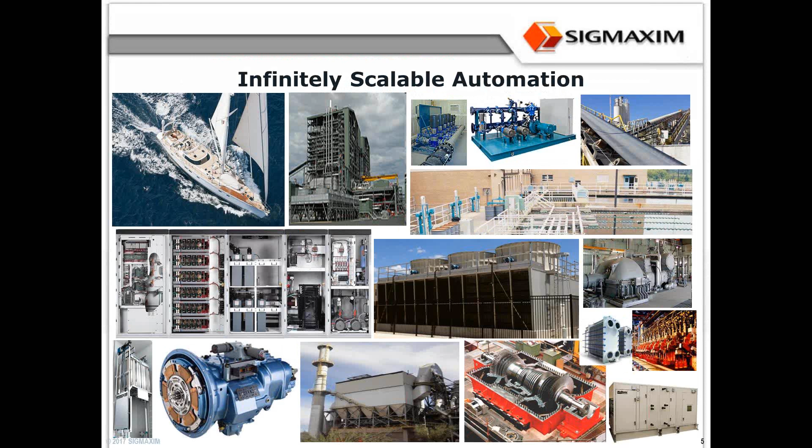So from products that are like a boat, which have multiple subsystems that exist inside, to things that are much more flexible, like making tooling for bottles and stuff like that. So beside the size of the product, there are also products that require you to have a lot of design flexibility while you build them.

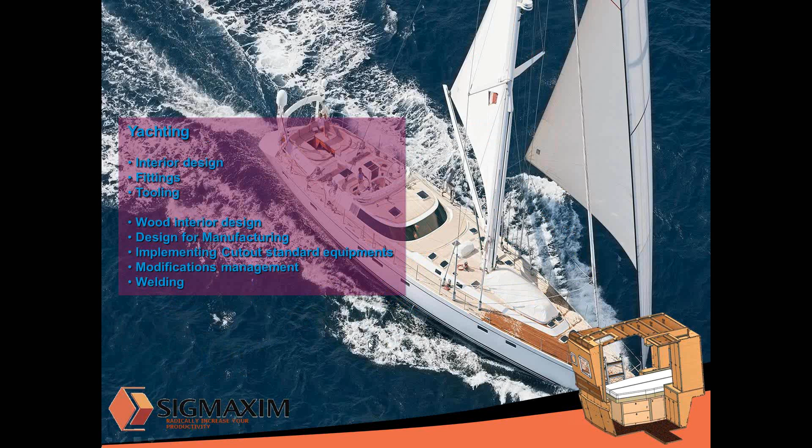So it's not a product that's totally like a pump, pre-engineered ahead of time with multiple variations of what you can change in it, but rather a product that kind of has to fit an environment that you're building. So things like a yacht here, each one of them is a unique product. An architect actually draws what it is that you're trying to build.

So how can you automate something that is going to be very different from one point to another? That's the type of thing. Another thing would be like watches. You're really literally designing watches to be unique from one to another. So what you're trying to do is basically automate the process, the steps that are going to be taken as you build these products.

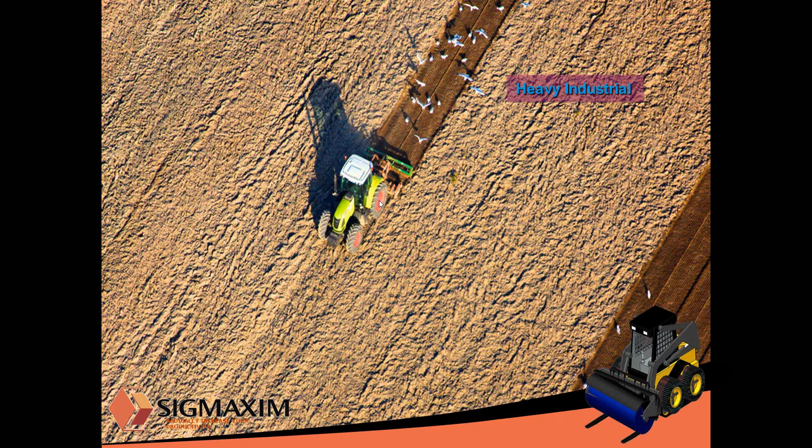So things in the medical field, industrial type products, they're very different from one to another. However, the process of building them is the same. So we want to automate those things. For us in the company, since we've been working in this automation for 17 years, internally we have over 20 different what we call implementation practices. They're all automation, but the needs of different companies about how you implement automation differ.

So internally we had to build tools that apply to a lot of different environments, but internally we also had to be able to talk to each other about what it is we're trying to do. So I'm not going to talk about 20 different things. There are a lot of nuances in there, but I'm going to take 4 different buckets and talk about them here and show you some demos.

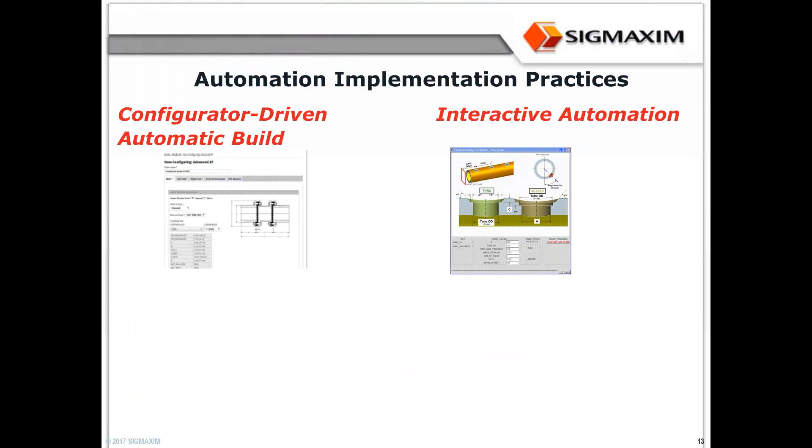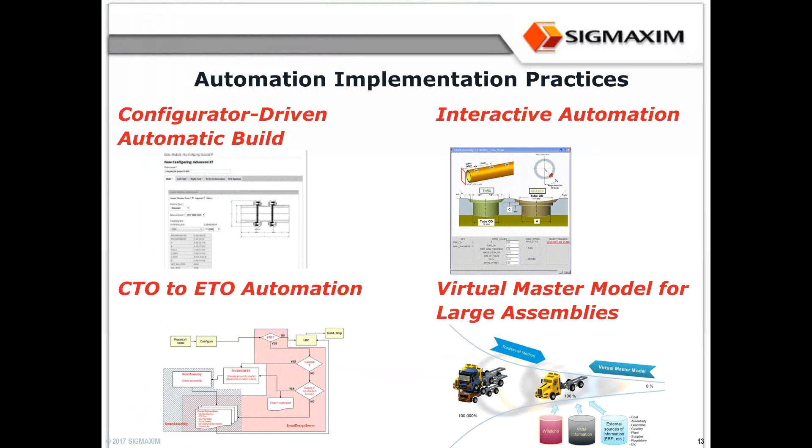So the very first thing is what we call configurator-driven automatic build. I'm going to talk about something we call interactive automation, which sounds like an oxymoron. I'm going to talk about engineer to order type products, configure to order to engineer to order product automation, which is kind of a mix of these two. And the next thing is something we call virtual master model, which is really dealing with very large assemblies and how we implement them.

So let's start with the first one, which is probably what most everybody thinks about when they think automation: what we call configurator-driven automation or automatically built products. Creo, for example, gives you tools like Pro Program, which allow you to have overloaded assemblies and turn on and off features and sets and parts and actually create a finalized assembly and part based on it.

So this whole concept is what almost everybody who thinks about automation of a product would think about. And we have different approaches, obviously, over 17 years working in this field. But for us, there is applicability. The applicability of automating the build of a product is that you have a product that can be fully defined right from the beginning.

The rules could produce an infinite set of results, and the input could be large, could be complex, but you can pretty much define everything up front. There is no intermediate user decision that has to take place. All the product exclusivity and dependencies are fully known, so there's no invention in here. And you need it to be totally autonomous, built without any user interaction, so all your engineering and non-engineering staff can enter a bunch of input data and automatically build a product.

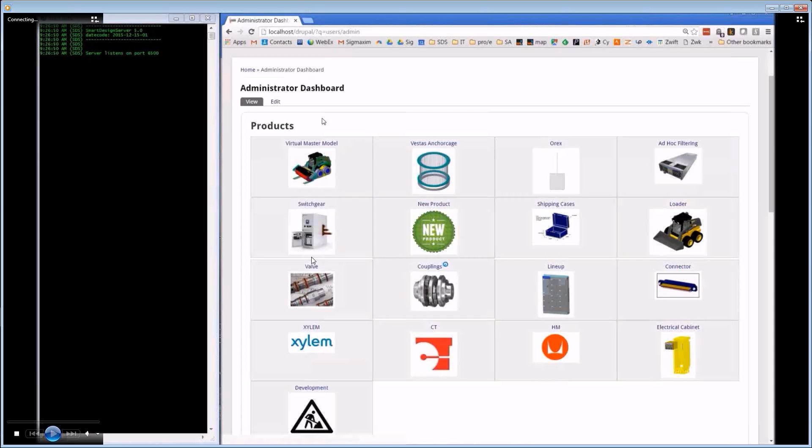So the very first thing is that with some customers, they need to be able to capture these rules and to build them. So the very first thing that I'm going to show you is what we call SDS Web, which is basically our configurator. It's a web configurator. You go and you sign on, you have an account, and out of this, an administrator would have built what the product rules are. So you have methodologies.

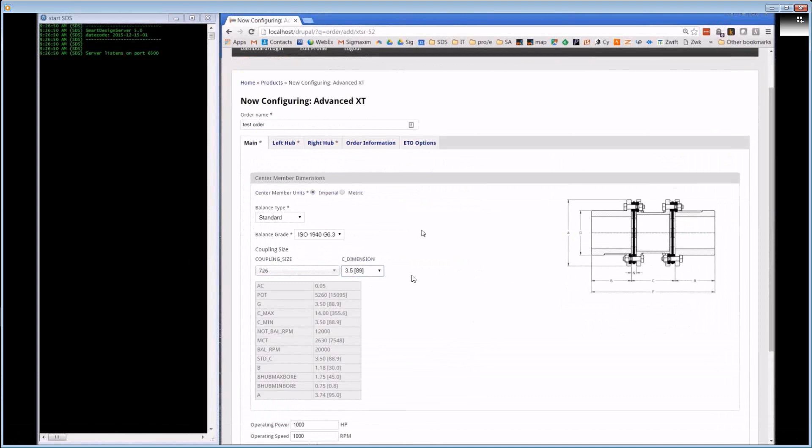In this case, we are picking a bunch of different options. Different options will go into the database, crunch data, give you some results back. It can do some math, which we will be doing later. So an administrator went and defined what your products are and what the exclusivity rules are, what the dependencies of different things to each other are, what is it that you're going to present to users in order to capture

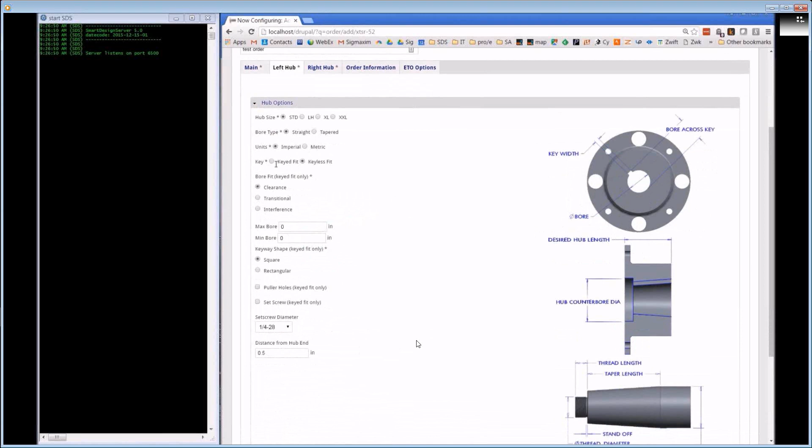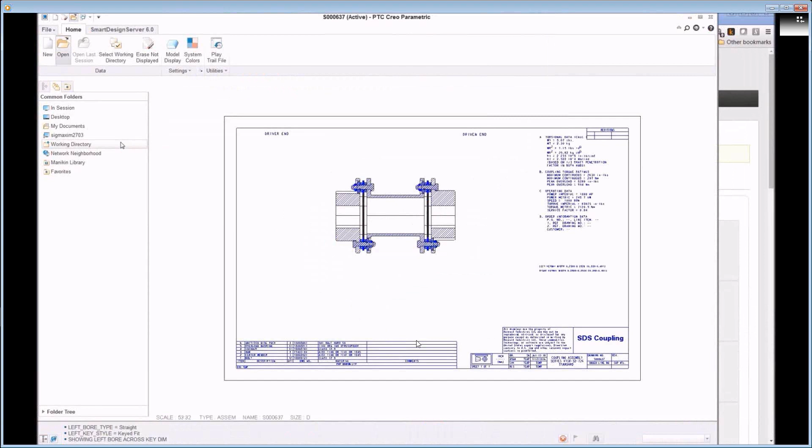these parameters. And if you hold on a little bit, you're going to see Creo. I know this presentation is for people who are interested in Creo. Once you define these methodologies, a server that's sitting in your server room is going to pick it up and start building the stuff in Creo. So Creo is going to take that data, which is all the rules of how to build that product, and you see it assembling what it needs to assemble, creating parts as it needs them, creating a drawing as it needs to. I'm going to stop this for a second.

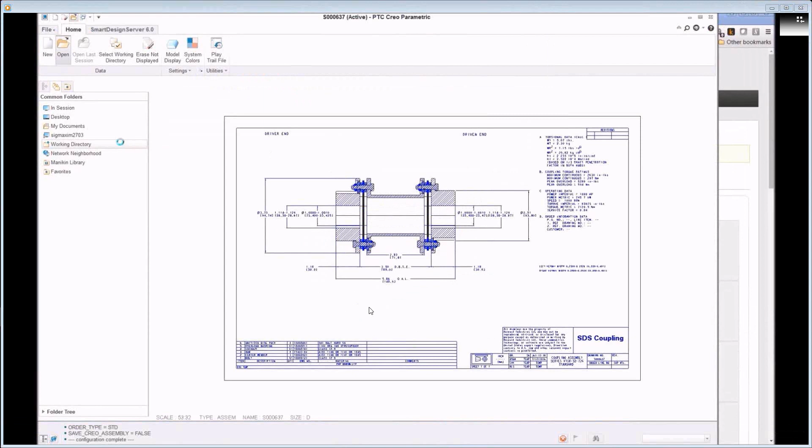All of this is happening on a server in the background. Nobody's seeing this, but that would make for a boring demo if I don't show you what's actually happening in the background on that server. It's happening in non-graphic mode because it's a lot faster to build it in non-graphic mode. So it builds whatever it needs to build.

And then whoever is on that portal, in this account, sees that there is that configuration, and that configuration has certain deliverables that came in from Creo. And in this case, we sent them that drawing with a bunch of other calculations, and we sent them basically a PDF of the drawing so they can decide whether that's indeed what they want to have.

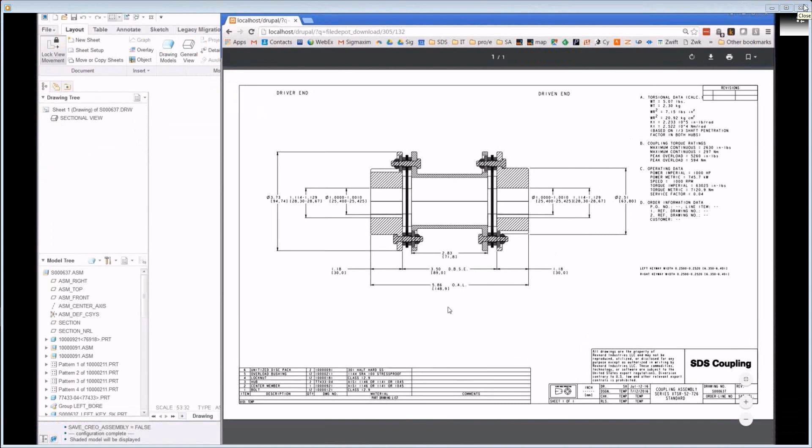So this is, to us, this whole area where we are crunching product automatically. The rules of how to build these products are known, and we put them together by reading these rules and going into Creo and building the stuff in Creo that we need. Now, so far it's pretty straightforward configuration of product that we've built. Even though here I showed you stuff that's building a new object, not just putting objects together. You can see that it's assembling things together, creating some features, making new parts, making some drawings.

Configuration of automatically building product can also happen in a much more complex environment. So I'm going to show something else here that is a little bit of a next step, basically. What we have is this packaging kind of environment where we're putting together some pump equipment and all the plumbing of how these things are going to go together. So again, we're going to go into this configurator. We're going to build it.

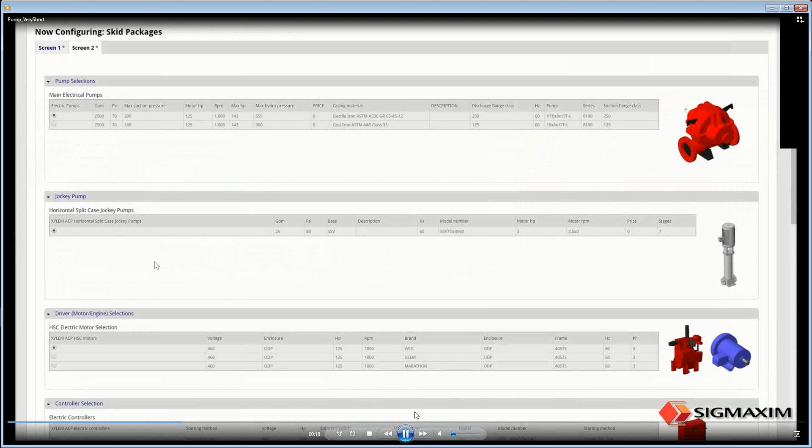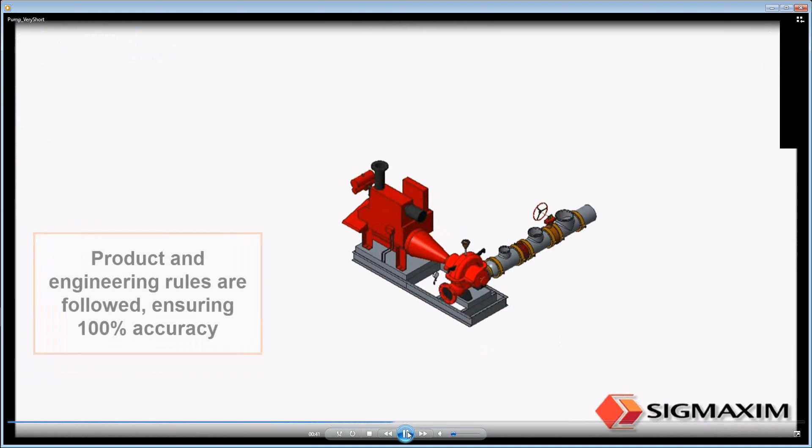Some of our customers might not need this front end because they have their own ERP system or whatever it is that they have to capture the rules and the options of what their customer would want. But here it's going to go into the server, and the server is going to try to build these things. So the very first thing it's trying to build is looking at what we asked it to build, and it's going to build it. It's just coming in from this configurator. It's putting together one object at a time.

And I will try to stop it here for a second just to describe something before it continues. In most cases, people can understand a product that you can define in rules and you can apply these rules.

A lot of times we have customers that say, well, my product is too complex because the rules don't fully define the product, and I need to look and decide how to solve the situation. It just happens that the human brain doesn't work the same way a computer works, where you have basically a decision path. The human brain is the best pattern recognition tool that exists in nature.

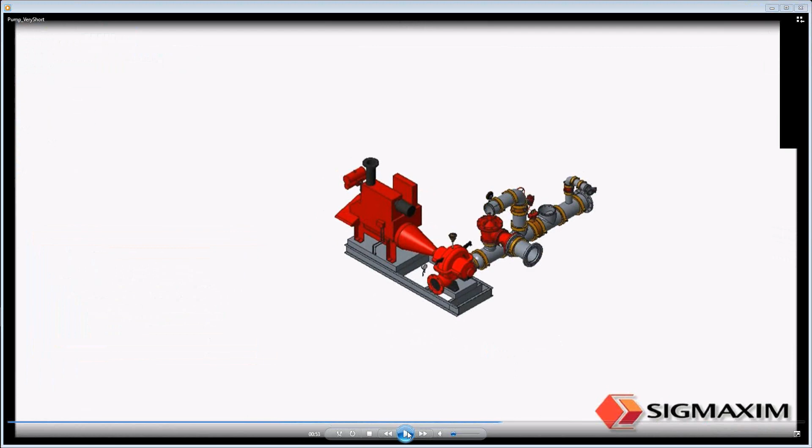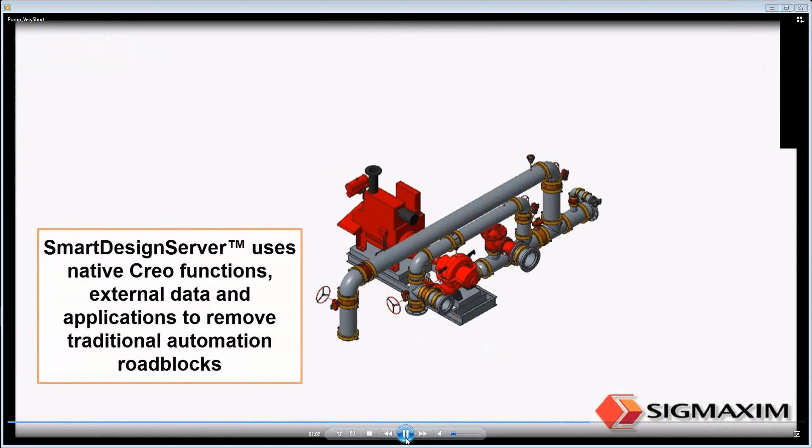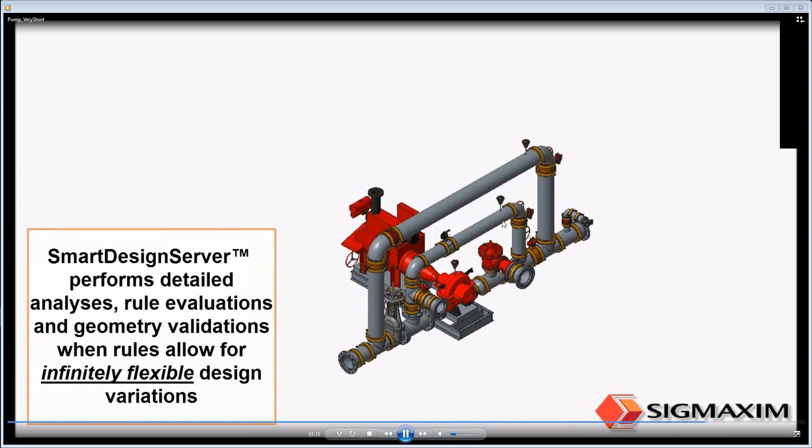It works with multiple threads, thousands happening at the same time, and you recognize the pattern and just apply it. However, you can map it so it can see things and apply them more systematically. So in this case, geometrically, the rules told it we're trying to do something that can't be done. Usually the decision tree will take over and solve the problem based on the methodology a user would use, like in this case starting a different path. As we added some equipment here, the system decides we have to recursively go back and fix what happened before. It's literally the way you would think about it, but you have to map it a bit more systematically for the system to understand and execute on it.

So we call this geometry-based decision-making, which applies on top of this auto-build, allowing us now to apply these auto-build processes to a much broader set of products that you usually wouldn't think would apply.

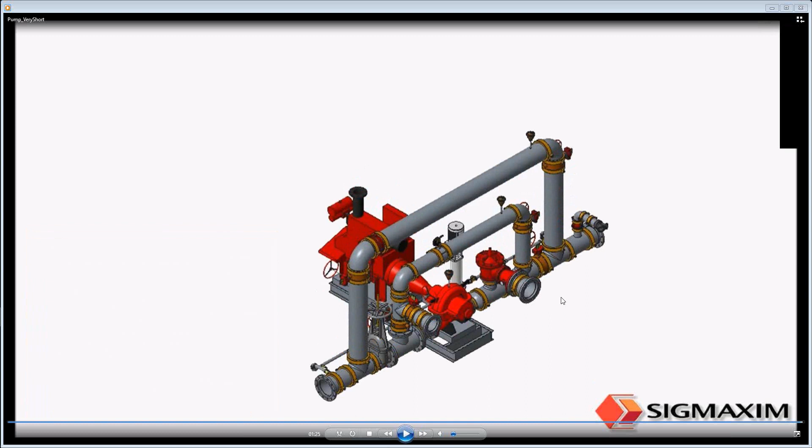So that's the very first type of product I want to talk about, which is this configurator-driven automatic build of products. But not all companies are a good fit for automation like that. With some, you can't actually derive a product totally by rules, and usually you have to have a human making those decisions. So how can we automate an environment like that?

We call this interactive automation, which sounds like an oxymoron. However, what we're doing is looking at the process of building a product and streamlining it, making it faster, because the product cannot be fully defined. So we need some user input in order to build that product. Not all options, rules and dependencies are actually going to be known. So what kind of automation can we do?

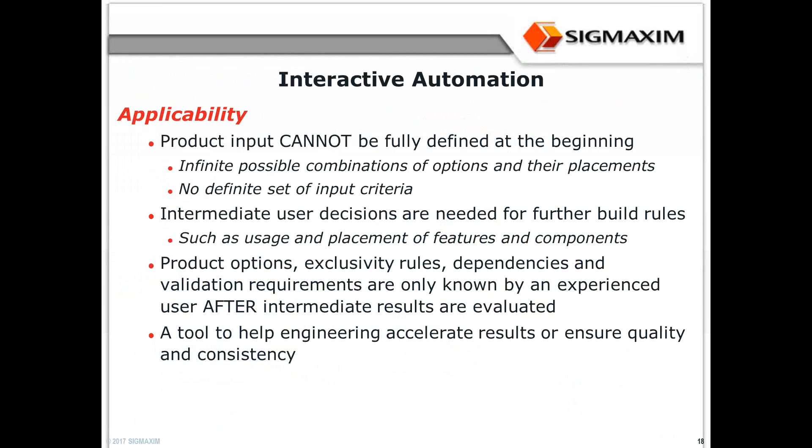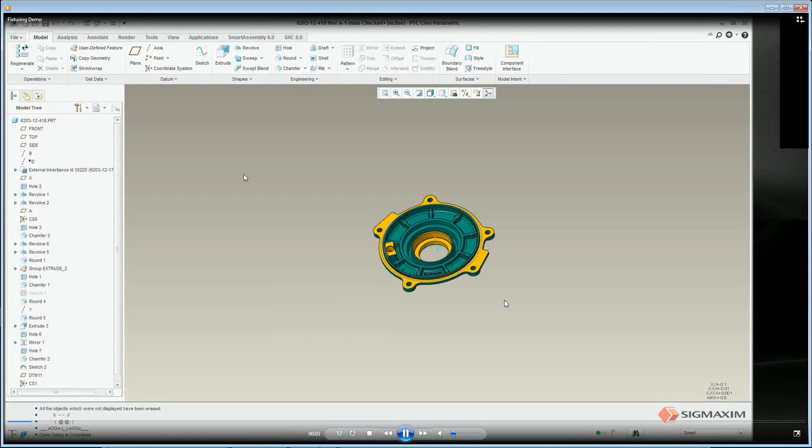We can take the commonality, the things that happen all the time, and build them up with micro or mini automations that get reused over and over in different order to execute what we want. Let's look at the first example, which is tooling, like fixtures. A fixture is going to look very different every single time, so somebody who builds tools and fixtures will produce something different each time. However, it's a combination of things that happen every single time in different order. So we don't know what the fixture at the end is going to look like, but we know we're trying to build, in this case, a milling fixture or assembly fixture or something like that.

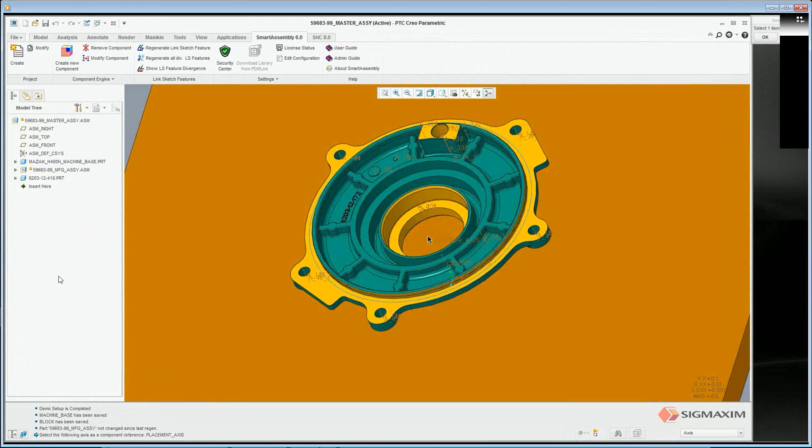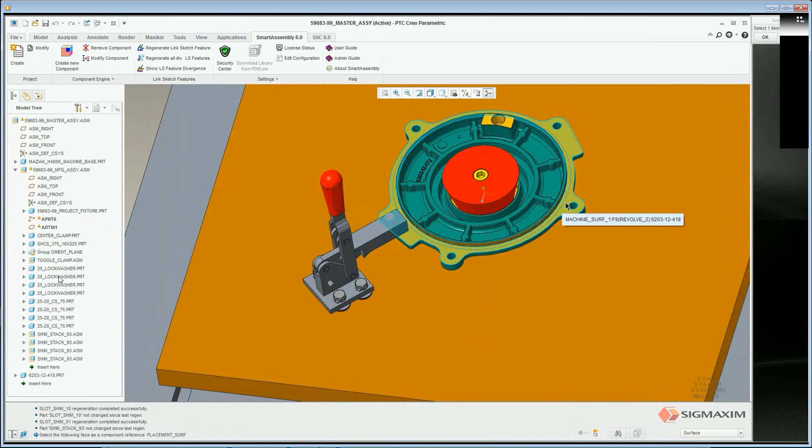Here's a toggle clamp, same thing. I want to click that toggle clamp, I want it right here. It's going to bring it up, tell me if I want it somewhere else. Yes, here you go. Every time it does it, it's assembling it, bringing the proper shim stack based on how high it's ended up. We put it at different heights, so you see different shim stacks, making the proper holes where they're supposed to be, bringing the proper bolt, screwing it in the right place. So multiple steps are happening and they all mesh up together - it's not just speed, it's the potential of making errors.

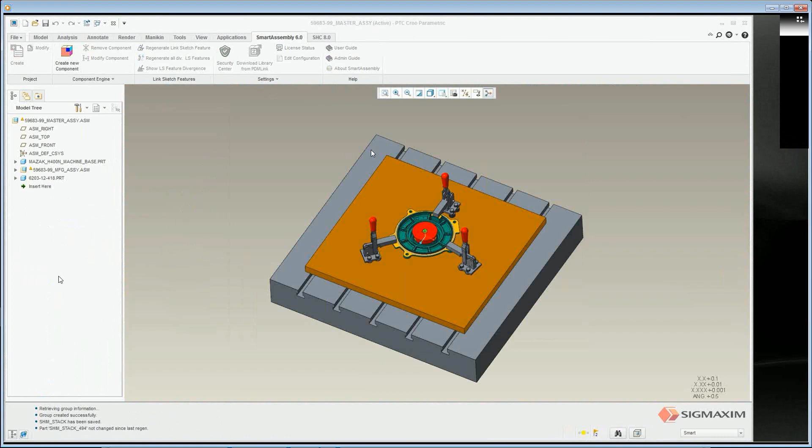Here's an alignment pin - where do I want it? Right here. Again, it's going to create the right hole with the right clearances, etc. So we continue.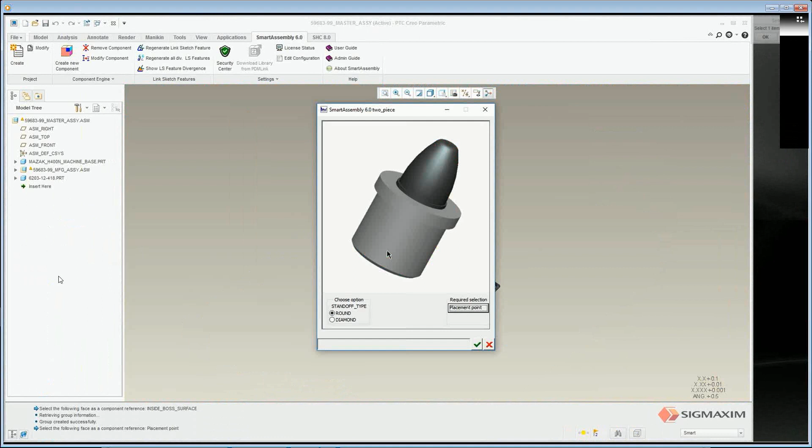This process automation is a combination of multiple tools that will happen every single time the way you would use them, and you would use them onto different assemblies with different products interchangeably. You can still use interactive Creo to do whatever doesn't fit into the process. It's one odd place where it's going to happen.

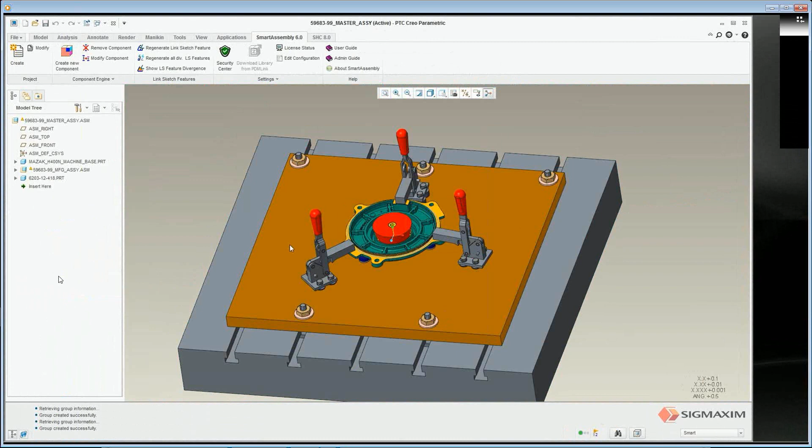However, the things that happen a lot, you map them into these automation tools and start using them. So the goal here is not to reduce something into a few seconds, it's reducing it maybe into an hour's work versus a day's or two days' work.

And here you go, I'm going to go and create the drawing. So creating the drawing, I want to make it just with dimensions, I want to coordinate, I want to make a bill of material, I want a weight chart, etc. So this is what we call interactive process automation - it's just looking step by step and building it.

Now here I used it for fixturing, which is tooling. I can also use it in product design. We have a lot of people, for example, that use furniture, wood design.

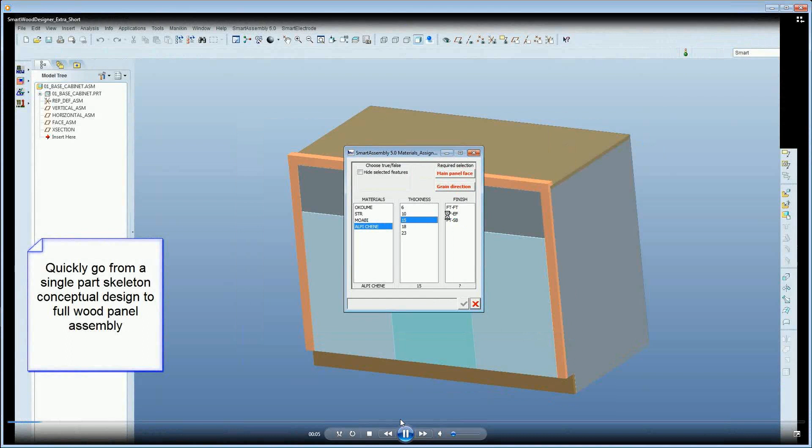This example comes from actually that boat that you saw before. We have customers that do yachts, and for a yacht, literally people go in and an architect comes for every single yacht - here's what it's supposed to be, the interior of the yacht. So what we want to do is give a system that's going to take a very simple design and auto-build the assembly from it, just by picking at these surfaces and building them.

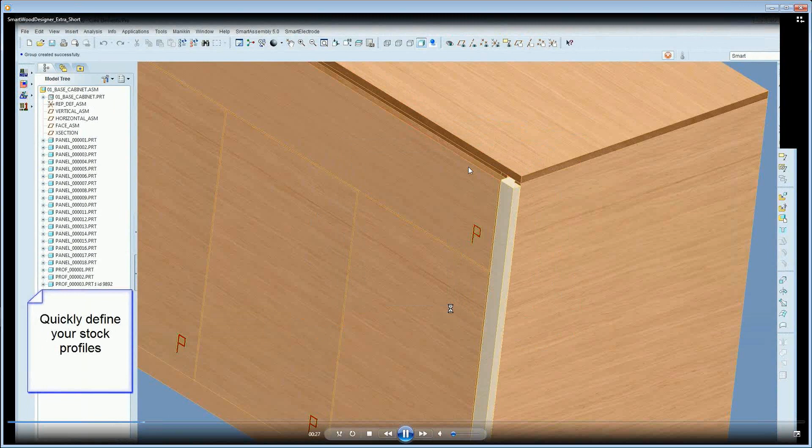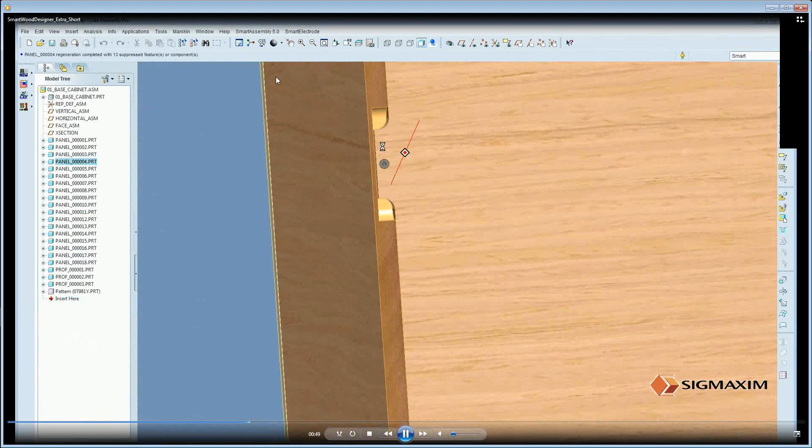Now we're going to go to all the wood profiles and sweep them. Here's where we want to put them in. We're going to provide tools of how to put the wood together - there are a bunch of different ways how you would finger join these pieces of wood together. So what we want to do is give you all the options that you're allowed to do, and quickly assemble it so it creates the features properly, in the right location, with the right hardware and the right clearances that can be manufacturable.

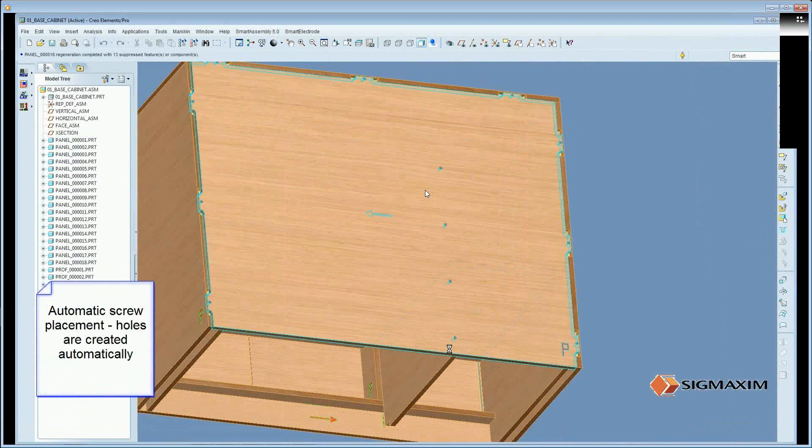I want to move the same thing to the other side, so automatically it will copy this whole methodology to the other side. I want to put these two together, and I want to use a bunch of screws to do them. So you have methodologies of how many you need and where you need to have them, and automatically assemble them, make the holes, put the hardware, right clearances, etc.

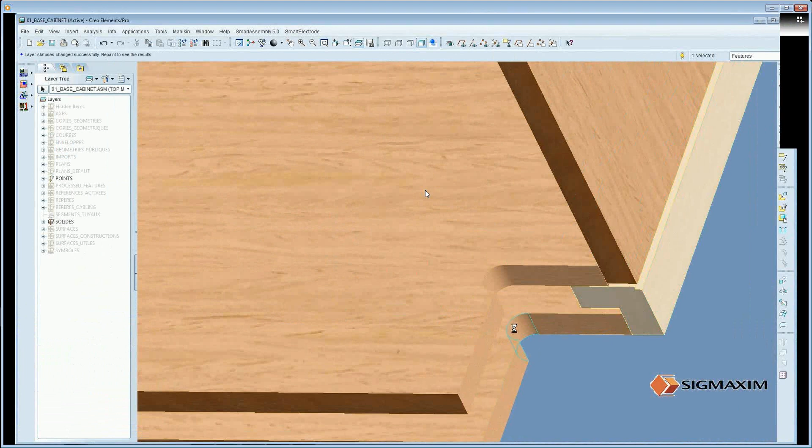Maybe we look at this end and we realize, yeah, this is not really manufacturable. So I want to automatically put up a proper profile so the router can go in and be able to make something where we can actually assemble the other pieces to it. So it puts it in.

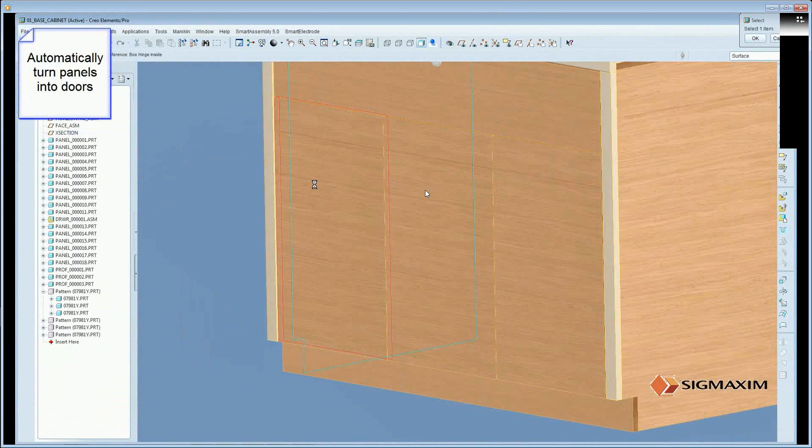Another thing we can see - somebody decided to have a drawer here. So why draw the whole drawer? I have a piece of wood here that's going to be the drawer, so automatically we're going to turn it into a drawer, since we know how a drawer is going to happen. Same thing with a door - here's a door, so I'm going to place all the proper hardware in the proper location with the proper clearances. We know how much wood thickness needs to happen between whatever hole we drill and the edge, so we can shim it out and make sure it happens pretty much automatically. So we're taking things that take a long time to deal with and making them pretty fast.

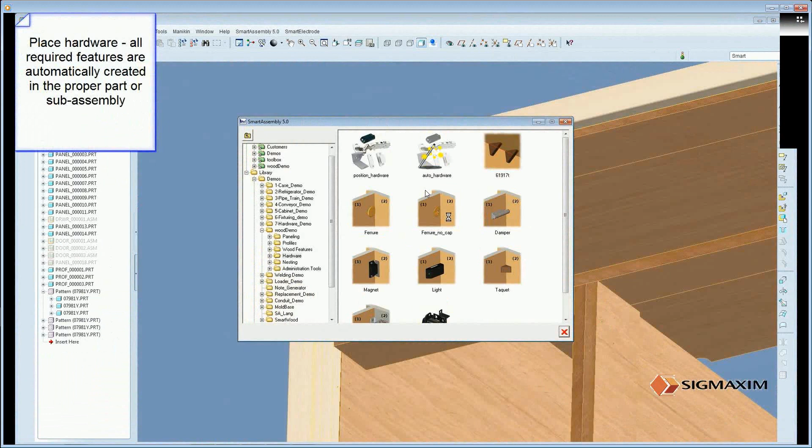Again, here's another piece of hardware that we use all the time. So rather than creating the feature here, feature there, assembling, bringing the right hardware manually, automatically I want to bring the mini lock with its retaining side on the other side, and automatically assemble it.

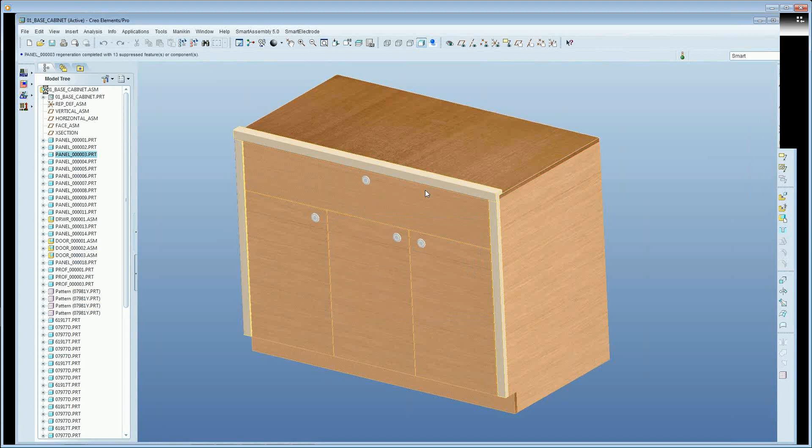So again, we have different types of finishes. I want to apply the finishes with the veneer on them, so I want to do them in one shot. Once that is done, I want to machine all of that stuff.

So these things happen on routers. We have pieces of wood, and what we're going to do is nest them based on the type of wood that's going to happen. I'm just going to go in there. This is a different design, same type of thing, same type of tool actually.

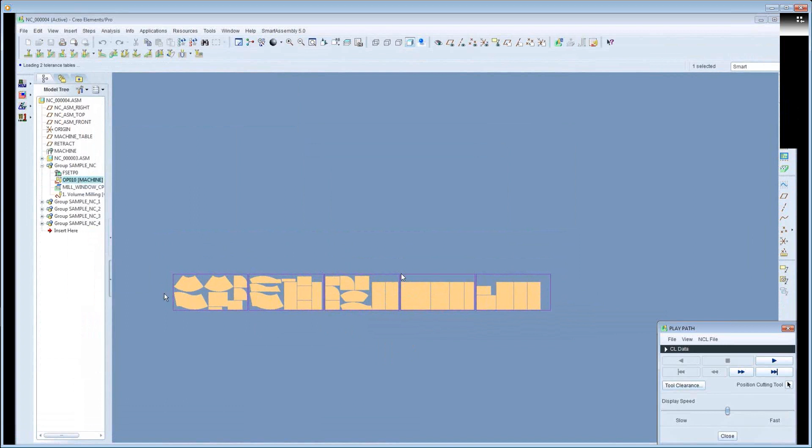What we're going to do is literally classify the parts based on their material, build them up. They're going to end up being 5 different sheets with different material maybe. From there, we're going to basically route them, so it goes on a wood router and creates all the tools as needed. You can see here the tool path moving for the router and building it.

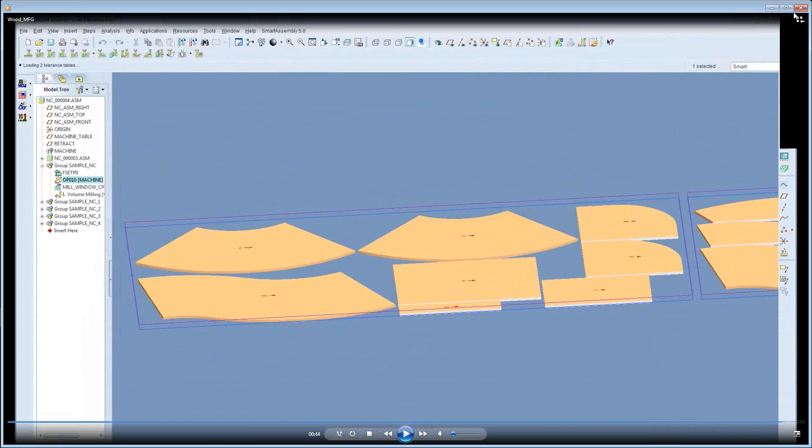So these things, this is what we call interactive automation. It's not the click button, everything happens in one shot. It's literally you decide what's going to happen, you decide what you're going to choose, but the things that are painful, that really cause most of the errors that happen, is removed from the user. And there are tons of examples of how these things would work.

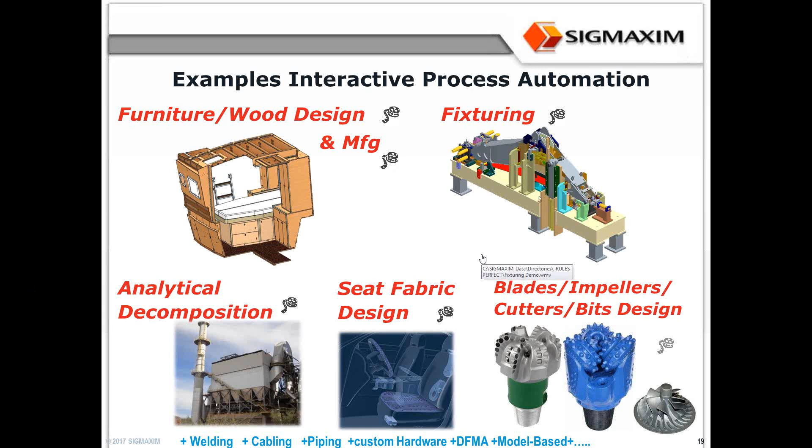So this is kind of the second crux of what we call automation, this interactive automation. The third one is more conceptual. I'm going to explain, because what it is, if you think about what an engineer-to-order product or a custom version of one of these products is, it's an ETO product that's usually maybe 90% a CTO product. It just has these extra 10% that has to be applied to it. And even when you look at custom, probably another 10% of that is totally custom in there.

So the idea is that rather than what we want to do, a large portion of it can be defined, so we can pretty much build it automatically. But even this 10% that is ETO, there is this commonality that happens a lot with what makes it ETO. So what we want to do is use this interactive mode to actually build those extra 10%, or at least 90% of that extra percent.

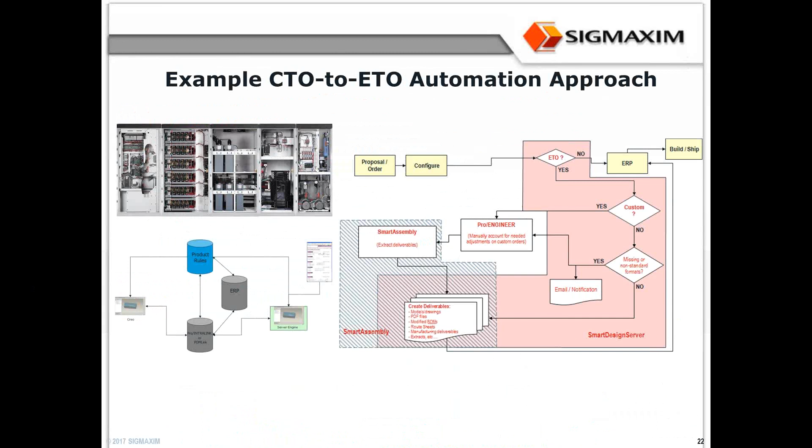So what I showed you, the two examples that I showed you, combine the two together. Basically what you have is this, how we deal with ETO products and how we deal with custom products. ETO and custom products is basically the combination of the two. We're going to auto build, and then we're going to go into this interactive tool. It's going to be automatically prompted. Most of the build is happening in here, and somebody's notified with the extra stuff that they have to do, and they just go and do them.

Now the last point I want to talk about here is how we build large product automation, because that on itself is unique. We need to build these large assemblies, we need to automate them, and it needs to be manageable. So I'm going to give you an example: a cooling tower, something like that, has probably almost 1 million components, multi-story high. So how do you build stuff like that?

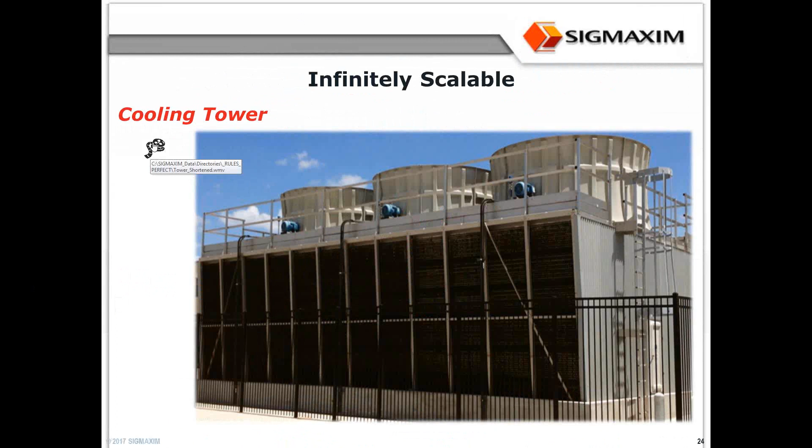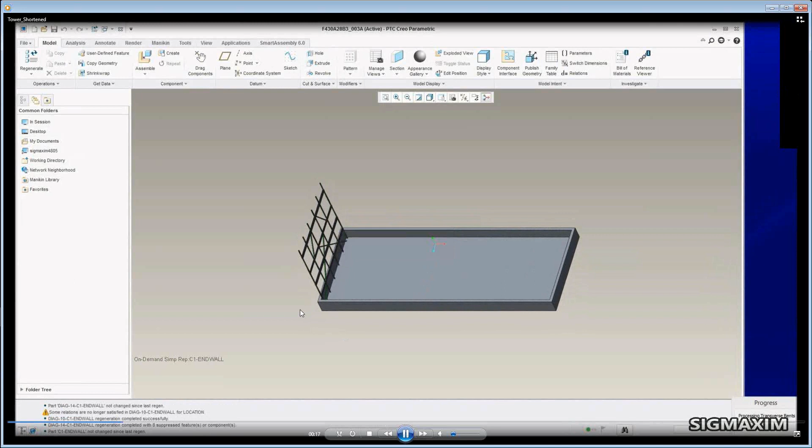If just to load it, you can't load it in Creo. So what you do is you build it from bottom up. The idea now is that you can manage it by, rather than turning on and off stuff, which is typically what you would think about in automation when you use, not just in Creo, any CAD system, because these systems are designed around what mostly people can see.

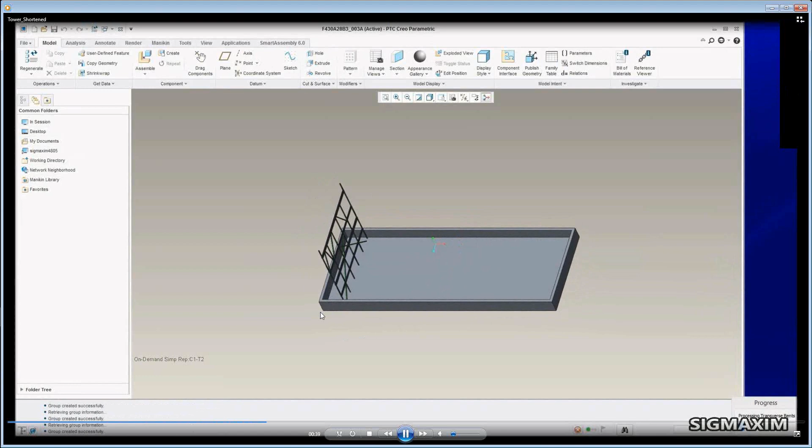So what we want to do is build on the fly, and you notice once we've built one of those, it's no longer in memory. So we have simplified the reps on the fly, it turns off everything else, and now we're dealing only with this portion of the design, and we're doing all the analysis of how to deal with it until we build all of them.

And now we're going to go to the other side and only have the parts of what we need in memory as we are deciding how to strengthen it, how to build those things, following these rules. You see these things happening pretty much on the fly. So we're not turning on and off stuff.

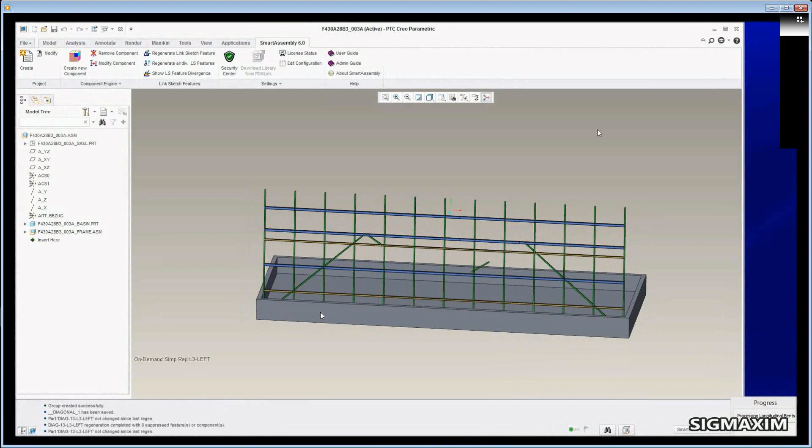We are bringing components, creating new components, and following the rules of how you want to create them. And as we continue with this product, it might take a day for something like a tower, actually could be more, at the end generating 15,000 drawings, but it's happening all on the fly.

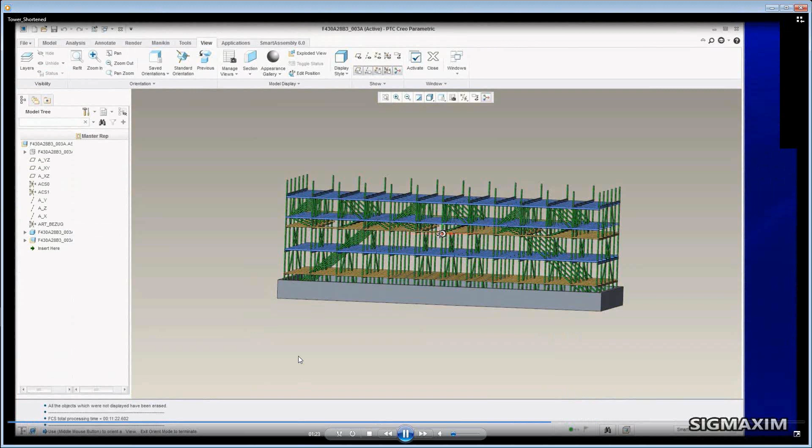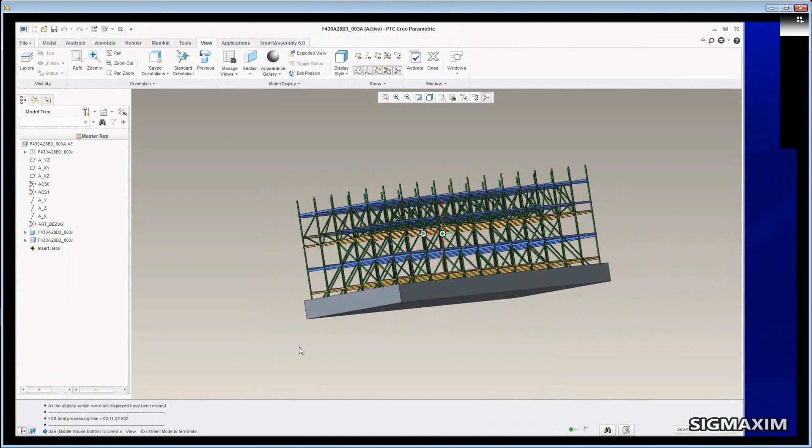So little by little you manage basically what is loaded up, and as it continues, you just turn off everything else, and you only need the outside skeleton in order to build the sheathing, and from there you have the equipment, so you don't need the sheathing. You might not need any of the structure if you want to. So you simplify the problem by just looking at it one piece at a time. Okay, so how do we do that?

In order to build that, you're going to bring in 1,000 times more stuff from Windchill, for example, just to arrive at what you want. Plus, you have such a massive amount of data that you probably can't open them. Now, what we have proven over the years that's way more manageable is to build up. And here I'm going to say it from 0%. Practically, you never build from 0%, but you could. You're building, most of the time, from something that might be a 40% baseline that you will always use, and you build up from it.

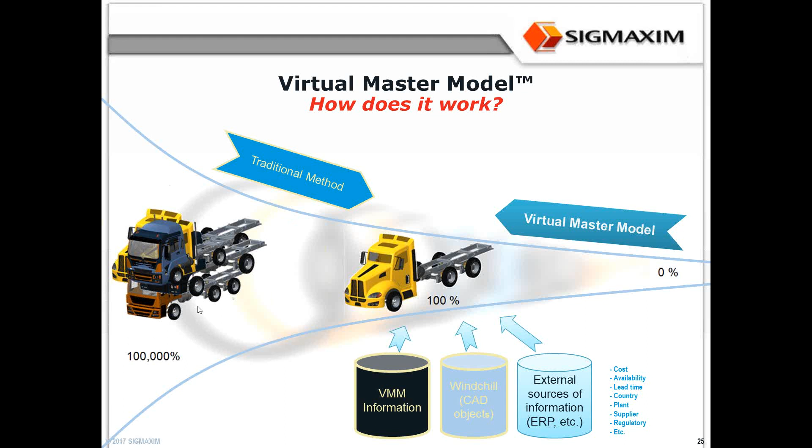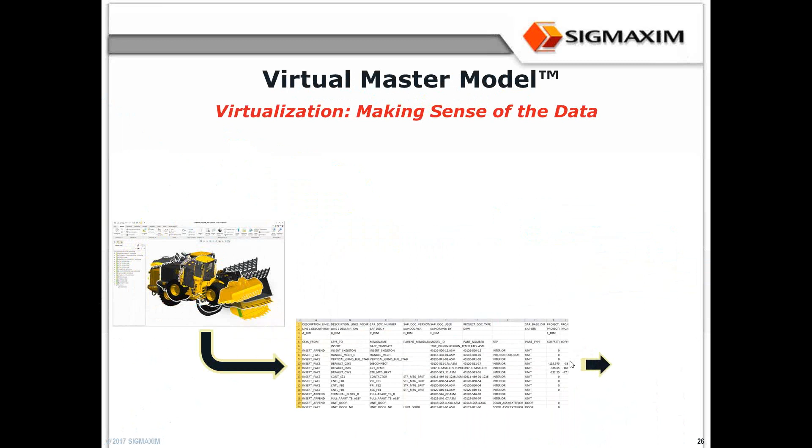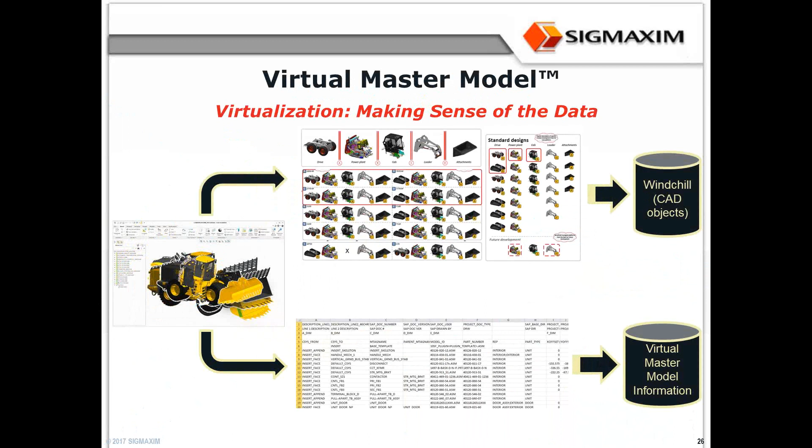Now, as we implement this, we don't ask users to throw away what they've done over many years, and they have a bunch of models that are actually mapping together and working. So we have a methodology of virtualizing that stuff, which is going to take this master model, this mess that they have on their hands that's becoming harder and harder to manage, and make sense of it by distilling this information into that repository, that virtual master model info, and the rest of the info stays in Windchill. So a simple reconciling of that data into a more manageable data structure.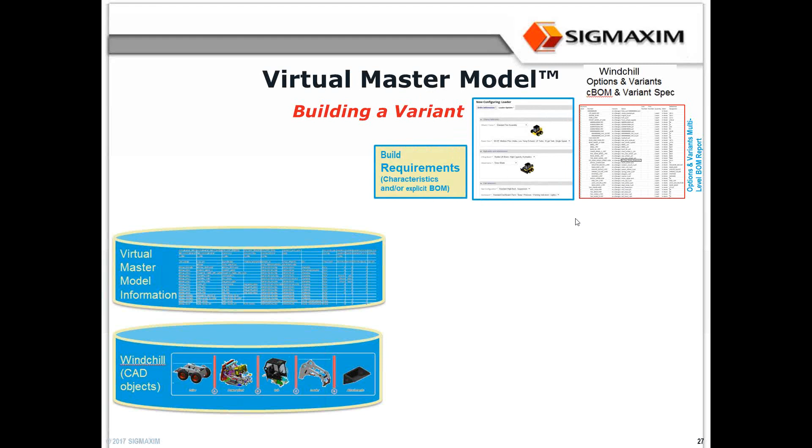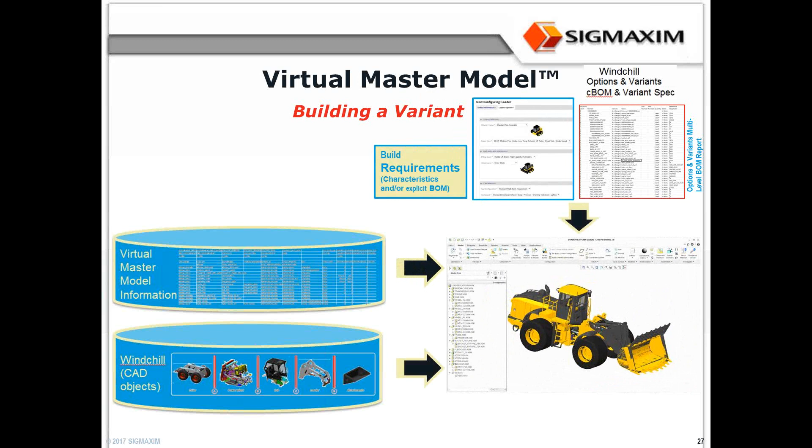After that, the day-to-day build of a variant, whether the information for the variant is coming from Windchill options and variants, from our configurator, from some other configurator that might exist, or from an ERP system that you might have, on the fly, basically, we're going to take the information from Windchill and auto-build it. The same way you see some of these demos building these things, we're basically making sense of how that information loads together and building it up.

So, to wrap up this presentation, what I hope to have shown you is multiple different ways of thinking of automation in Creo, and different ways of implementing this automation in a company based on what the company does. To summarize: products that can be automatically built based on rules, making deliverables automatically. Products where you need users to interactively make decisions, but we can crunch that time and the potential for error down to a minimum. Products that kind of span both worlds, and how to deal with these large assemblies.

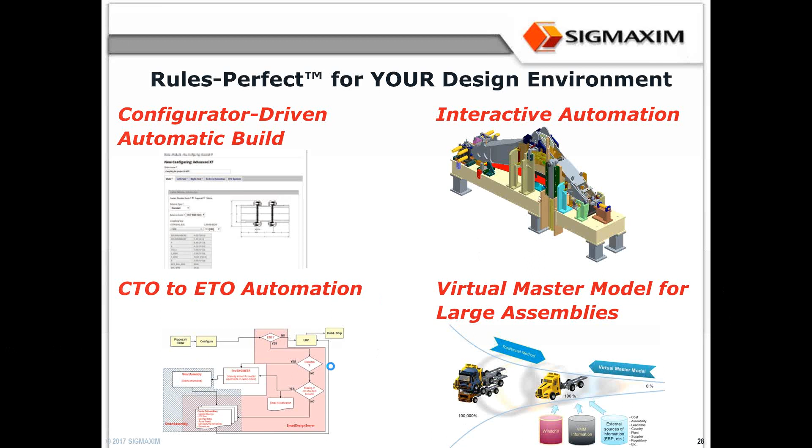That kind of concludes my presentation. We will have time for questions, so we can open it up.

Any questions? I know a lot of you are already familiar with Sigmaxim. Any comments, anything like that? Anyone? Bueller? Oh, wait, I think I see a question.

This is from Adam, and he wants to know how much programming knowledge do you need? Yeah, so our typical user is somebody who knows Creo, not somebody who knows programming. There are scripts, there is logic that has to be mapped out. Usually, we have a 3-day training course that we take to 5 days, where we start building the automation with the customer. So we have a 1-week training course.